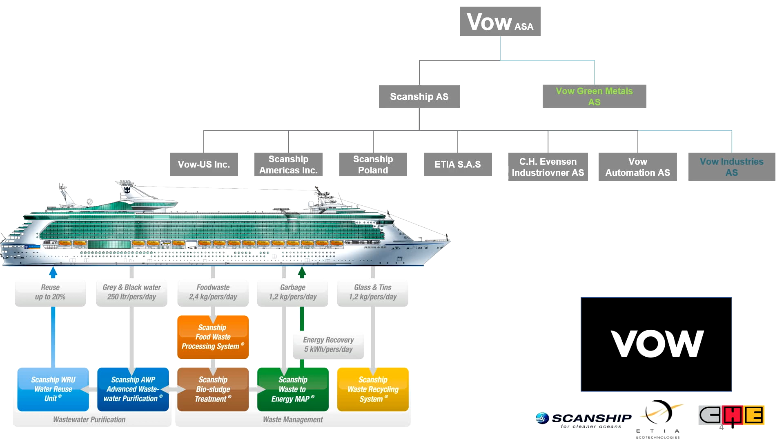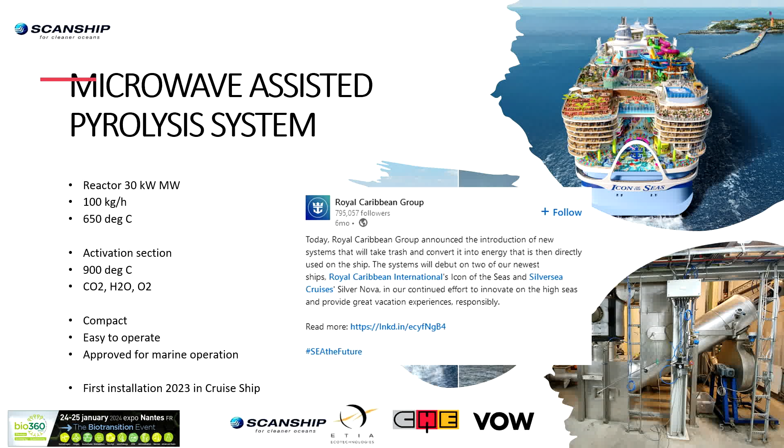Next, please. I work in a company, VOW, converting sewage sludge, providing equipment for waste treatment for cruise ships. Next, please. Last year we installed a pyrolysis unit on a cruise ship. You could see here the ship accommodating 10,000 people, and 2 pyrolysis units were installed there.

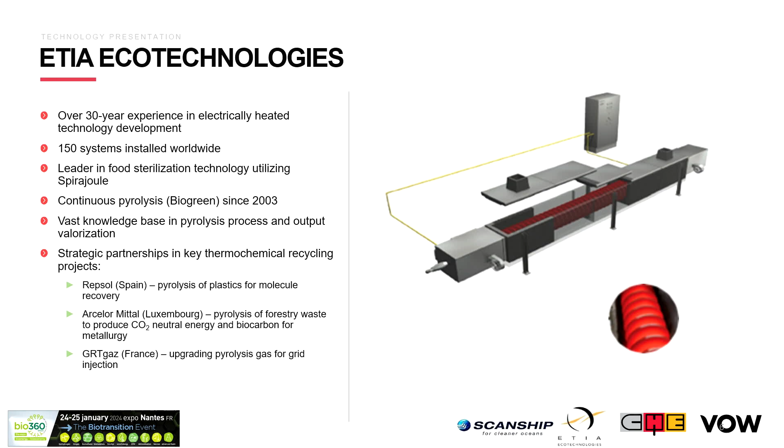Next. Another, our daughter company, is a French company, ETIA Ecotechnologies, developing an electrically heated oven to perform pyrolysis of any type of biomass or feedstock, including plastic for molecule recovery. Here on the slide you can see some examples. Next, please.

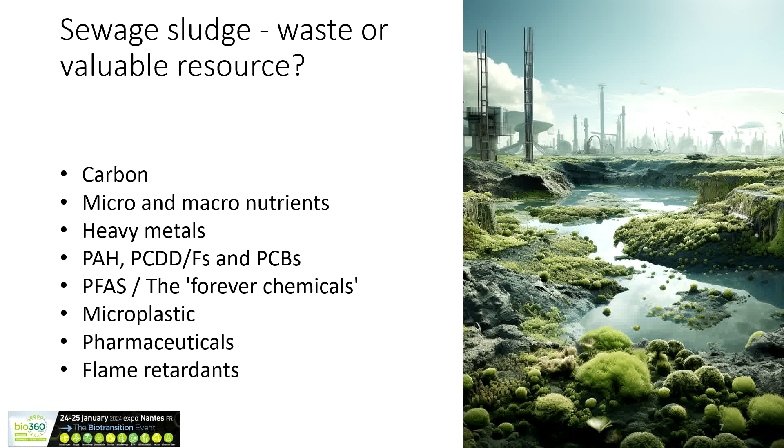I myself am a chemist, so when I look at sewage sludge, I don't see a dirty or smelly material. I see carbon, nutrients, heavy metals, and at the same time, a lot of harmful pollutants, including PAH, PFAS, so-called forever chemicals, and others. Thank you.

Next. When you look at the destination of the sewage sludge in Europe, most of it is applied for agriculture, used as fertilizer, for landfill, for composting. So there is a circulation of all those harmful, persistent, toxic chemicals which are not possible to remove with wastewater treatment methods, and they are coming back to our food we are eating or water we are drinking.

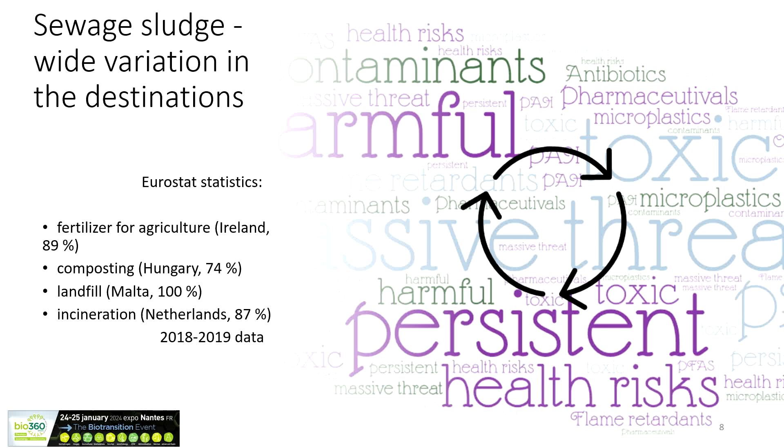So if you look around you in this room, almost every item contains PFAS, which cause cancer, decrease fertility, influence our immune system. Next, please. So if those forever chemicals are so harmful, should we not just burn them off in the waste to energy process in some incineration plant?

Actually, there is quite recent research made by a Swedish group showing that high temperature during incineration is not enough to remove all those PFAS, and they are released in the form of flue gas emissions, in products like ash or gypsum, or treated process water. And researchers report 4 grams of PFAS removed with flue gas emissions during the year.

When you compare this number with the tolerable intake set by the European Food Safety Authority, it's 0.6 nanogram. So the difference is 1 billion. That's quite impressive. Next, please.

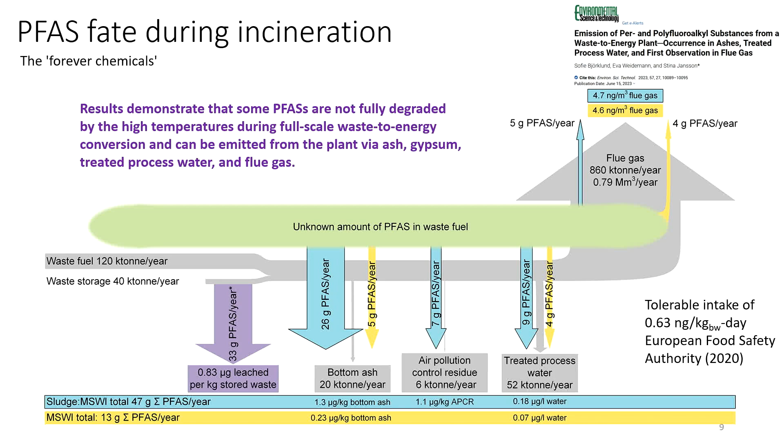We just finished a 4-year research project where we studied destruction of those PFAS in the pyrolysis process. So we showed that in biochar, you have less than 2% of PFAS. In the emissions, you will have less than 3%. And most of it, more than 95%, is decomposed or trapped in pyrolysis oil.

Why is it not possible to say if they are decomposed or trapped in the oil? Simply because many lab methods are being developed right now. So this is a very fresh topic. You'll find many answers just in research literature.

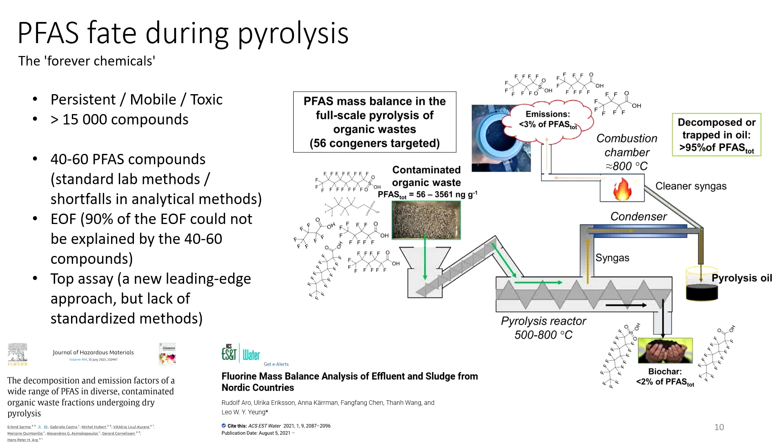So for the moment, if you send your sample to the lab, it's possible to analyze between 40 to 60 PFAS compounds. At the same time, there are more than 15,000 PFAS used in the chemical industry. So that's quite a scary topic, I would say. Next, please.

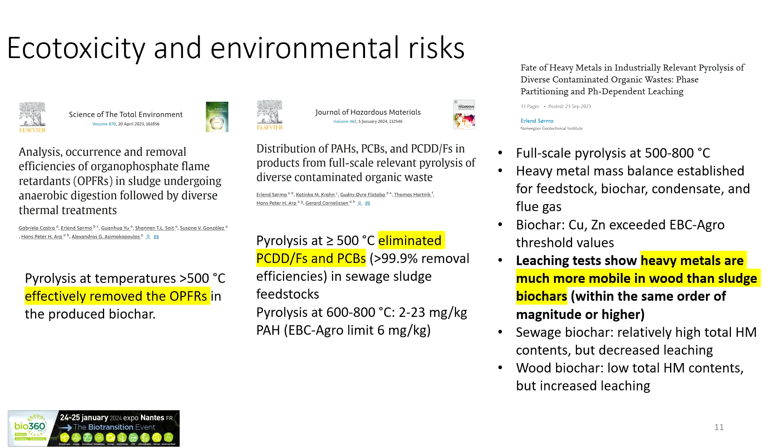If you think about application of sewage sludge to agriculture, in the form of fertilizer or sorbent, you also have to think about ecotoxicity and environmental risks. Together with our research partners, we published several research articles showing that pyrolysis performed above 500 degrees decomposes and destroys many of those harmful toxic persistent compounds. Next, please.

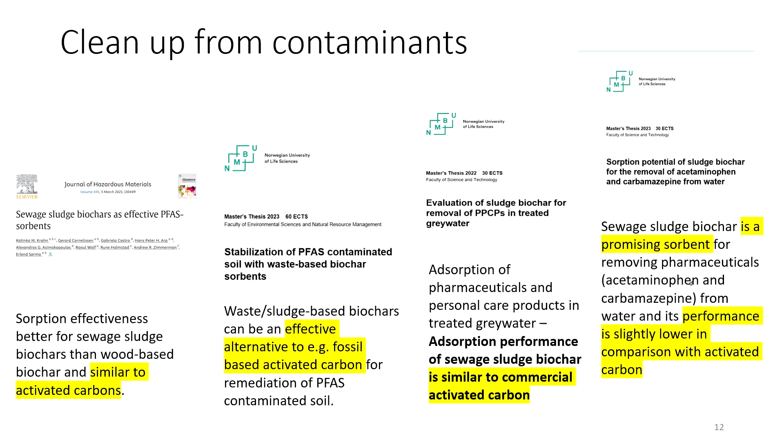Previous, please. Thank you. And here we used sewage sludge biochar as a sorbent for processes such as removal of PFAS compounds from contaminated soil or contaminated water, and also removal of pharmaceuticals from water. And in many cases, the performance of sewage sludge biochar was the same or even better than commercial activated carbon used as a sorbent. Next, please.

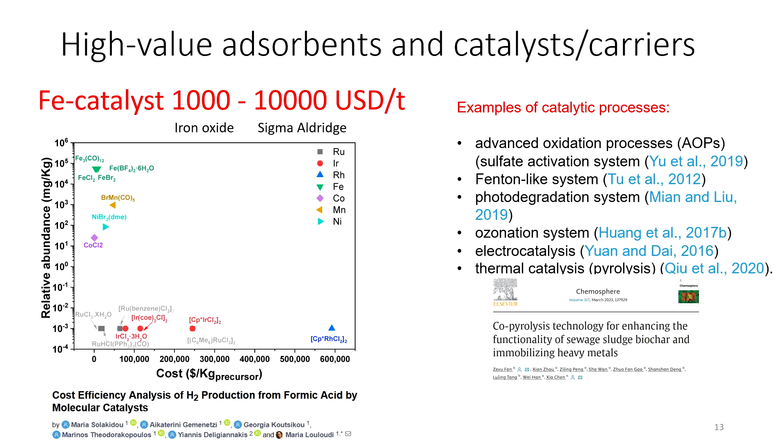The cheapest catalyst used in the chemical industry would probably be iron catalyst due to the relative abundance and lower cost of precursor. The price of iron catalyst ranges between 1,000 and 10,000 dollars per ton. For the moment, you will find about 50 different review articles describing performance of sewage sludge biochar as a catalyst for many catalytic reactions. So this is just one example, one fresh article on this topic. Next, please.

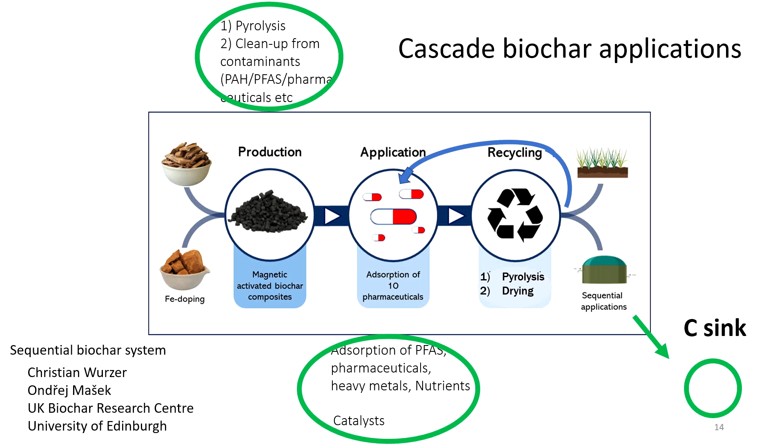Next, please. Next, please. And next, please.

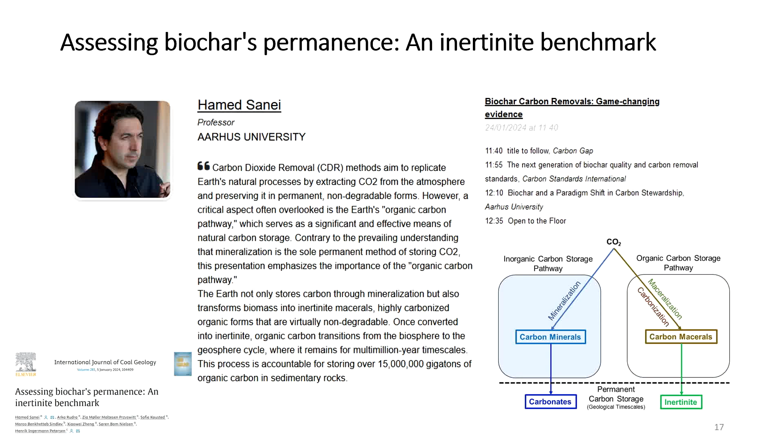What about permanence? Yesterday you probably heard a, I'm not afraid to say, revolutionary presentation by Professor Hamed Sanei, who showed that the biochar carbon capture and storage way could be an alternative to the classical mineralization way in the form of carbonates. So sewage sludge biochar could stay in soil for millions of years. He is even using a multi-million year time scale, in the form of very stable material. So this is very promising. I wonder how the shares of those carbon credit companies would rise after this news.

Next, please. If you try to estimate the value of sewage sludge products in the form of fertilizer, adsorbent, catalyst or carbon offsetting, you would see the following numbers. Some of them are quite impressive. According to the EU, in 2020, the 27 EU countries together produced about 3 million tons of dry solids per year. So if you convert that amount to biochar, the yield is about 50%, and if you account for 20% carbon in that biochar product,

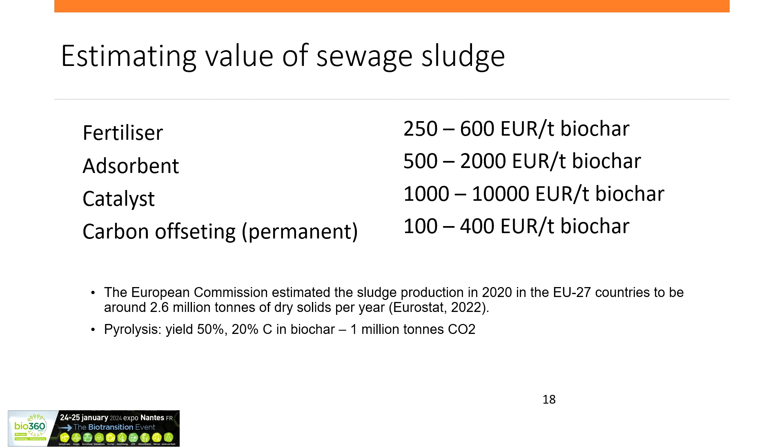it will give you 1 million tons of CO2 emissions. Just to compare this number with something: France, if you multiply this number by 300, France released 300 million tons of CO2 last year. So the numbers are impressive. Next, please.

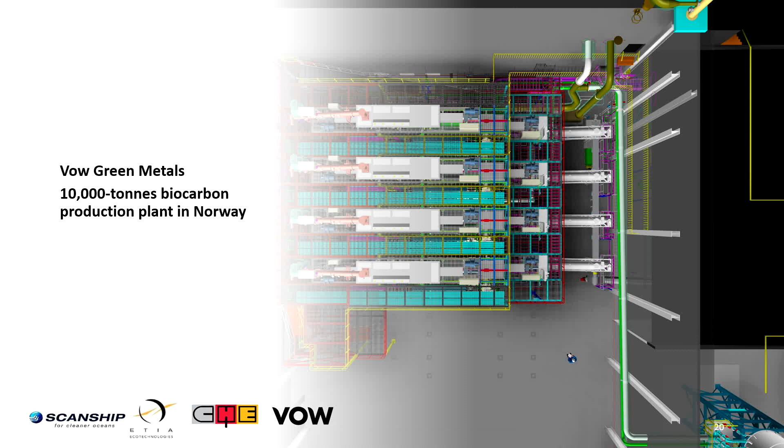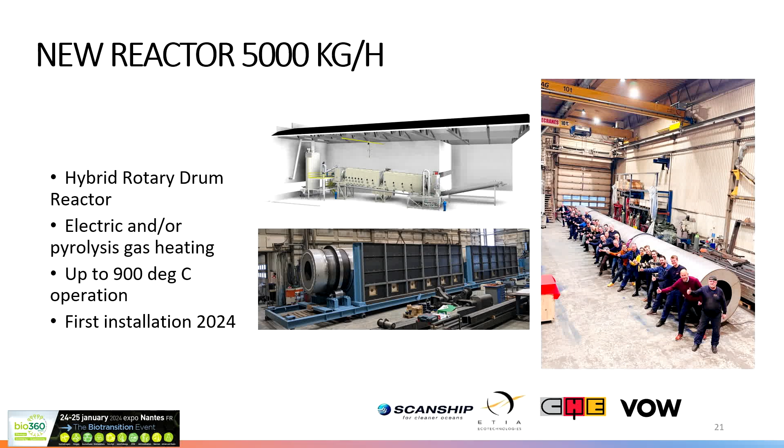Next, please. Yes, I think that's it. I hope I inspired you a bit with the value of sewage sludge. If you have questions, please come to our stand. My colleague and I will help you with answers. Thank you.

Do you have any questions now? Yeah, please. Yeah, thank you so much. Super interesting. A quick question. You talk a lot about big volumes. Do you also see space for smaller or medium-sized players in the valorization of sewage sludge or other sanitary types of waste?

Thank you. Yes, we actually are selling much smaller equipment for much smaller volumes, but at the same time we see a need for larger volumes, because we are focusing on metallurgy, huge amounts of biocarbon, and also sewage sludge conversion. They need larger volumes. But we have both. Do you have any questions?

Sorry, I have a second one. You mentioned 4 types of possible outlets for biochar made from sewage sludge: fertilizer, adsorbent, catalyst and carbon offsetting. Do you see that there's enough market for it? Because you also talk about a lot of volume. So can the market at the moment absorb all the biochar that is being produced?